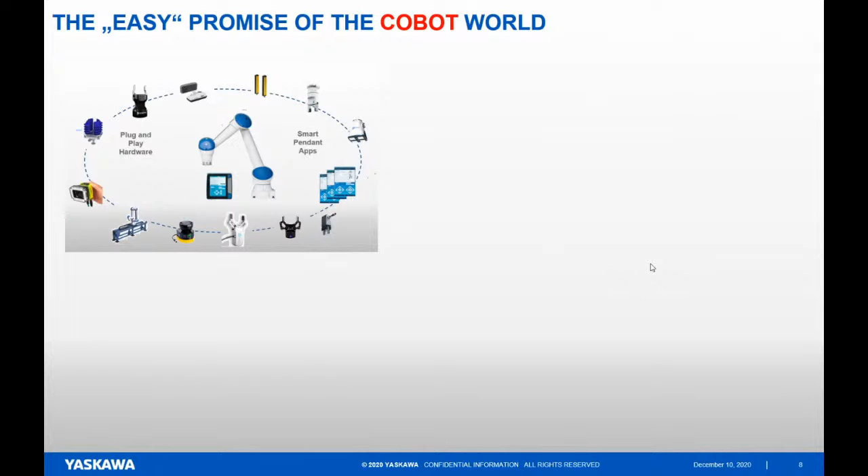The next thinking is about what is the promise which has been given by the cobot suppliers to us. Some years ago, a cobot supplier started the business with a new and fresh idea. I wish it was YASKAWA, but it was another supplier. At first there was a cobot, and that cobot came with a promise. Then there were easy plug and play accessories, but the promise had 4 points. Those cobots are easy to use or easy to program.

Even the word program is not good anymore in those circumstances. The next promise is that the cobot is easy to install. No fences anymore. The robot is easy to invest, it's cheap, and the other promise was it is easy to buy. I think these are the 4 options which have been brought into the robot world by the cobots.

The first point, is it easy to use? There is no discussion about it. Yes, it is easy to use. Is it easy to install? Yes, somehow, but there are also questions about whether it's really okay. Maybe the robot is easy to install. Maybe some of the plug and plays are installed, but is the application in the end really easy to install? That is the kind of discussion in there.

Is it easy to invest? Yes, if you just look at the components, but also here people are discussing, when you look at the solution or the real robotic installation in the end, is that really easy to invest anymore? And is it easy to buy? Yes, I think, but there is also discussion ongoing there. And we learned a lot from that cobot world about easiness.

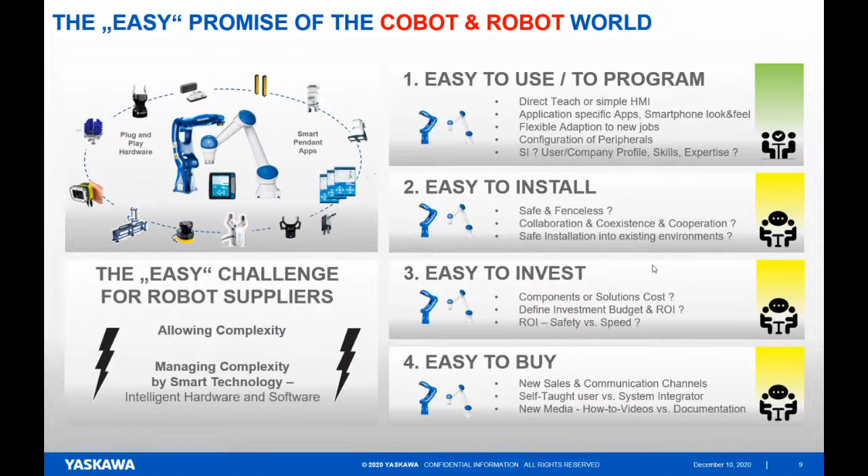This is the easy challenge for us robot suppliers. We would like to allow complexity, but we also want to manage the complexity to make it easy for the users, and we are doing that with smart technologies. The smart approach to realize robot installations.

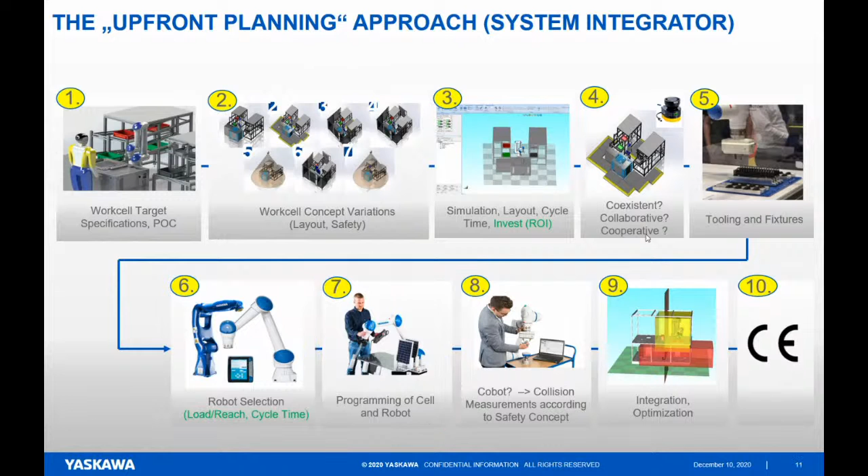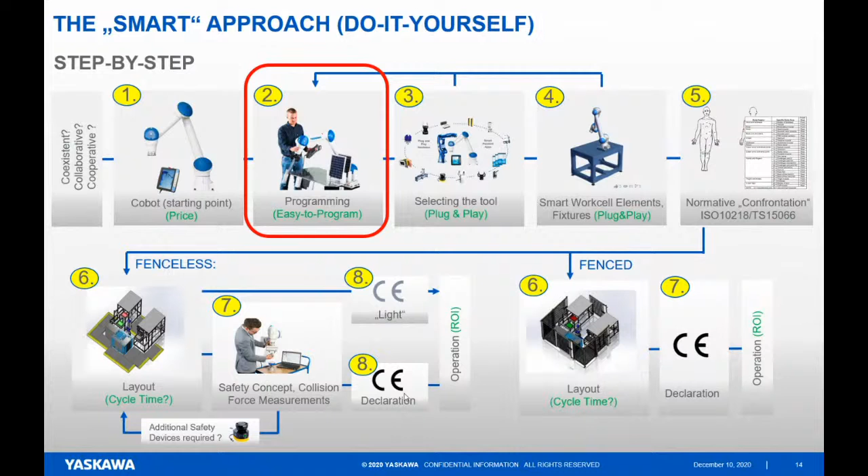So this is a different way how to approach a work cell. And the programming is much more in front of the decision-making process. And in that way, doing that way, programming is somehow in the perception of people much more important.

The variety of robot programming methods. You have manipulators, you have controllers, and you have many different ways today to program robots.

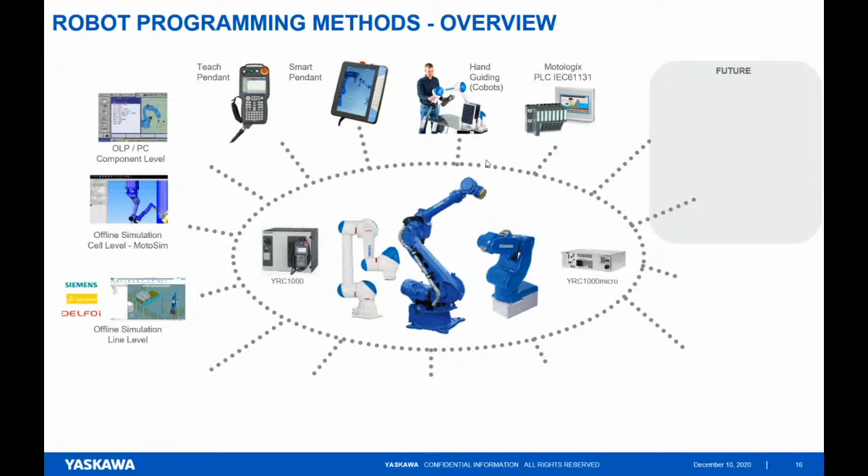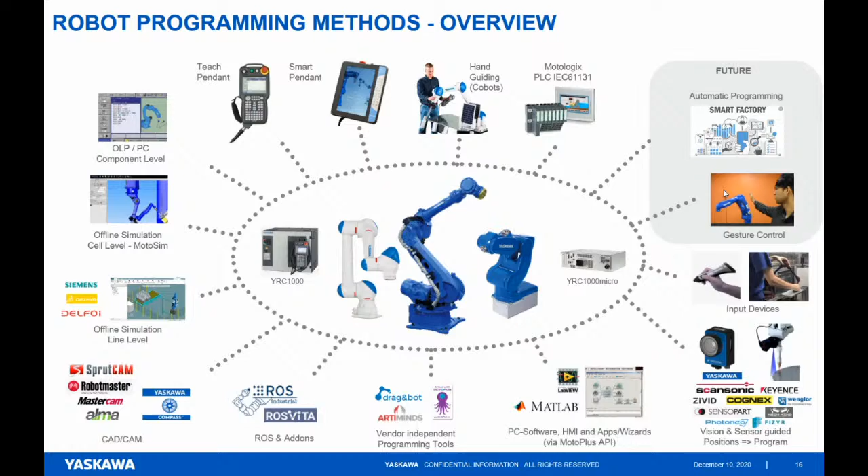Is hand guiding the best method? People say hand guiding is easy, and I agree, it's easy. If you have a palletizing job or a simple pick and place job, hand guiding is a very good method.

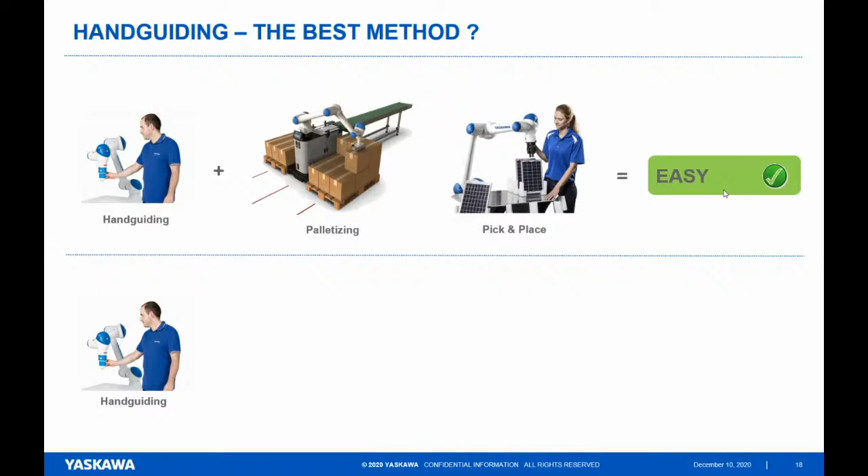But if you do hand guiding and want to do 3D printing with it, and have to manipulate the robot in a curve or in a 3D geometry, you're lost. And also, if you want to program a complete multi-robot arc welding station with 3 welding robots and positioners, and all motion should be synchronized, then hand guiding is really not the best method to program the robots.

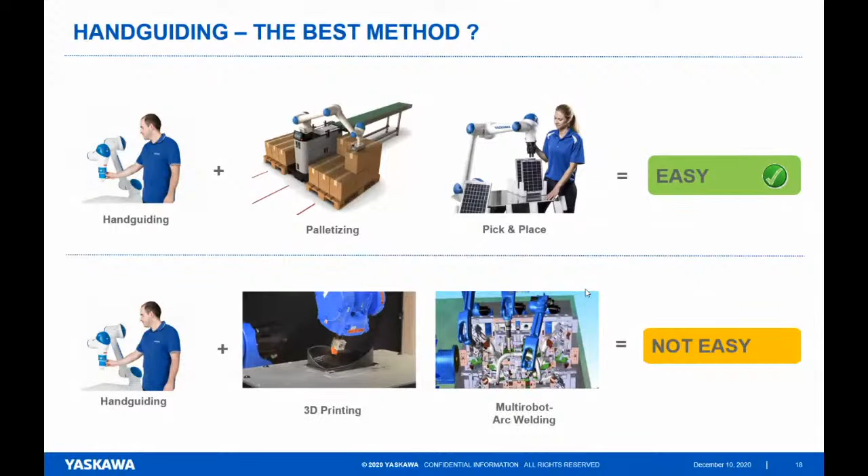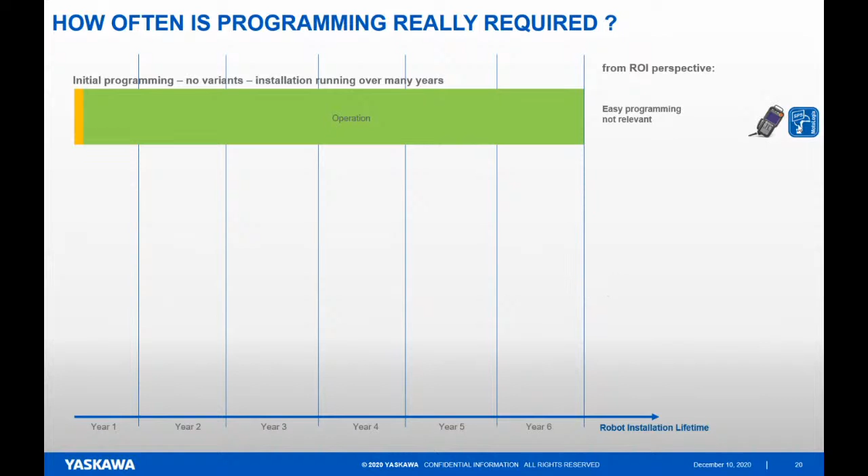Another concern you should resolve in the beginning is how often is the programming really required? Many robot applications have an initial programming, no variants in the beginning, and the installation is running over many years. So it's one-time programming and operation over many years. For that situation, from a return of investment perspective, easy programming is not that relevant.

Then we have initial programming with more variants. If it is possible to include the variants in the beginning, all the different parts, and you know them already, you can bring that into the initial programming. This initial programming is a bit more complex, and you most likely need some more complex features in the programming up front.

And then what many people have in tier 1 automotive is they have to run the line, and whenever they're doing programming changes, they're doing that offline in parallel to the operation. They prepare the program with offline simulation, and then they just break the operation, turn it down for a very short time, download the program and start the machine running again.

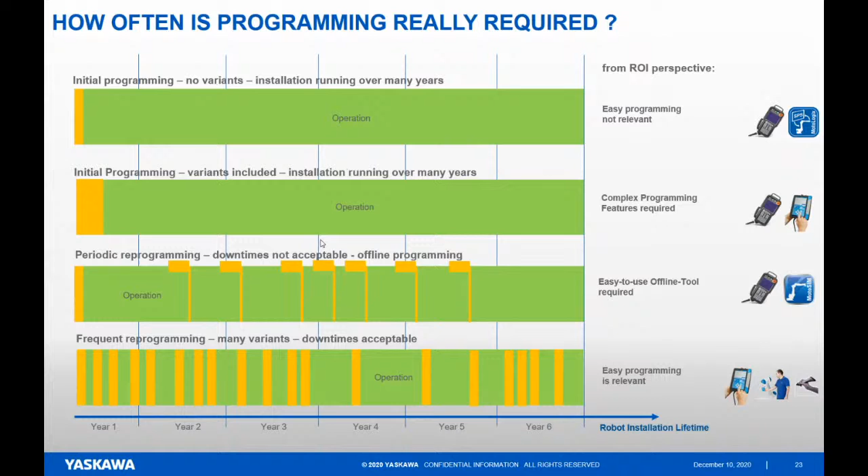So we have the situation where we have very frequent reprogramming and a very short operation time. We have a lot of variants, and in the beginning it's not really clear how many variants we will have in the future. That is a good field for easy programming methods like hand guiding or like smart pendants or easy devices. So in total, when we look at all the applications and the full variety, we can find a lot of examples where people would select very different programming methods.

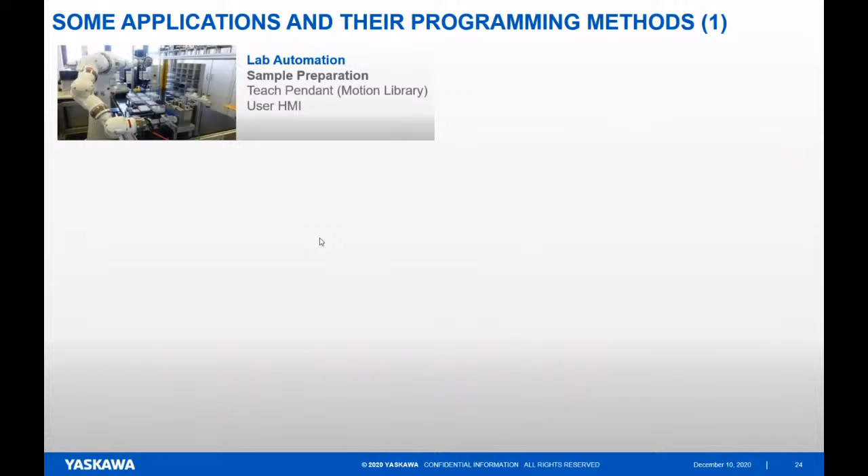Lab automation, that is teach pendant most likely, but in lab automation it's very important to have an HMI that the lab assistant can control, or select the sequence or the protocol, without involving any robot motion programming.

In the warehouse, we most likely use 3D vision or load packing software. In the dairy industry with cow milking, we are using teach pendant and 3D vision.

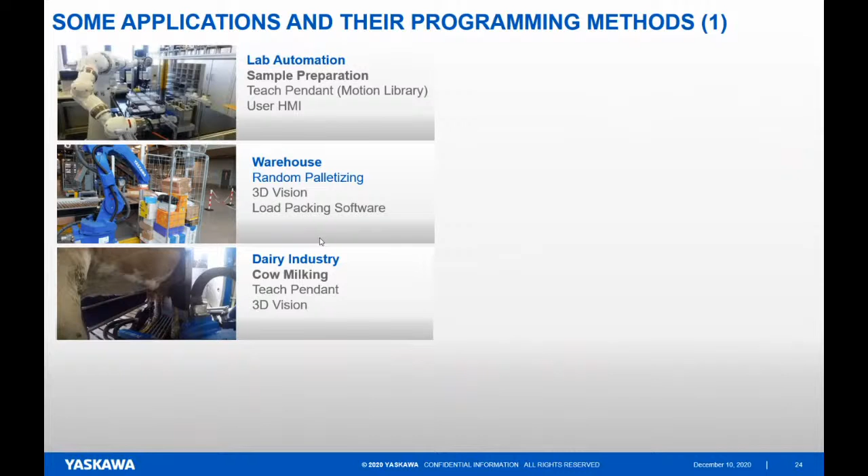In the metal industry, when you want the robot to do milling and deburring, you most likely would start with CAD/CAM tools, software, creating the G code for the robot. In the food industry, we have a lot of PLC controlled lines where people may prefer to program the robot with PLC function blocks.

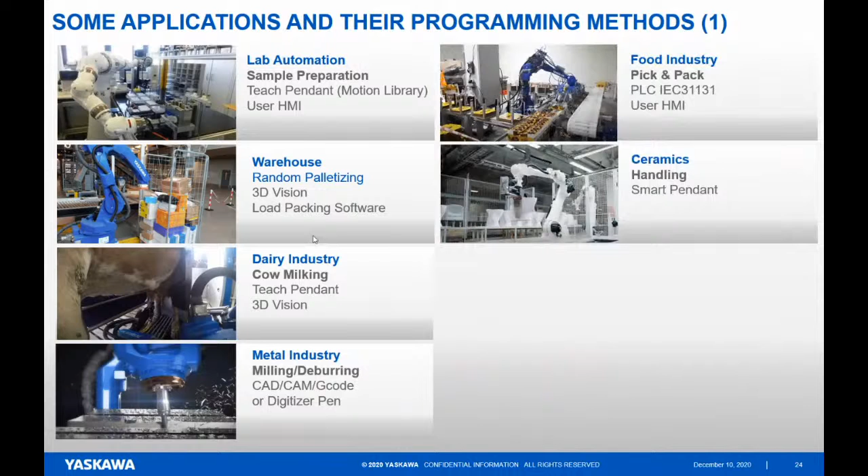In ceramics, this is a pretty simple handling operation, and the smart pendant would be a good choice for that. In logistics, cobot palletizing would be hand guiding, I talked about that already. In packaging, again, maybe an issue of PLC programming.

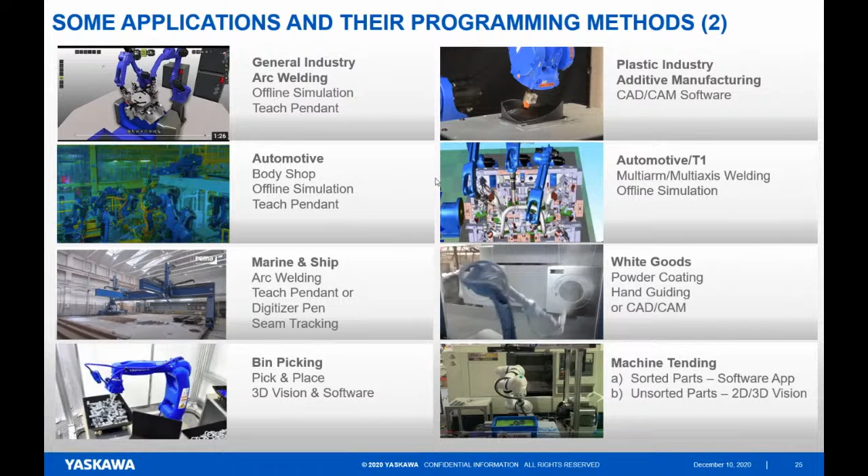I can give you more and more examples about these kinds of programming, but what you're seeing here is basically what I want to say: each market, each application has its favorited programming method, and you cannot really tell people that one programming method is the one for all method for everything.

Some details on the programming method. If we are using hand guiding, details are important. For example, it's good to guide the robot and have some buttons on the robot flange to program it, to avoid that you have to return to the teach pendant for every single confirmation of a step or a position you have taught. So those direct teach buttons give you the option to open, close the gripper, or to take over a position directly on the robot controller's arm.

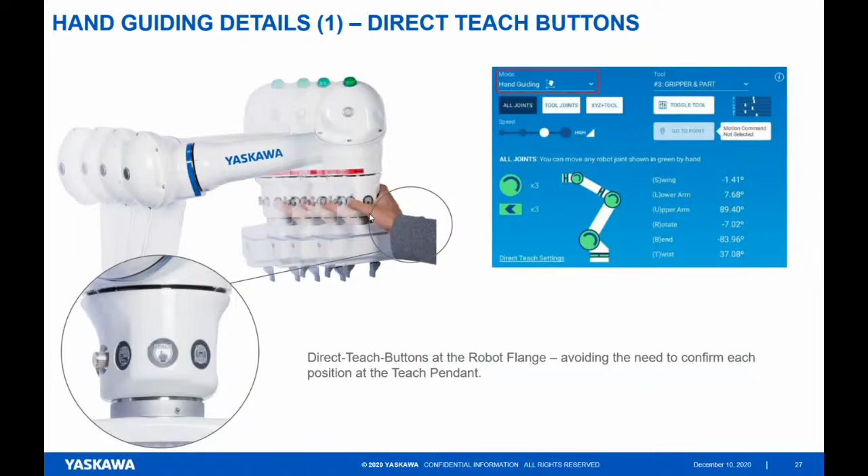The next nice feature is that you can move the robot away at any time to look for where the workpiece is, or if the robot is somewhere in the middle of your view to the workpiece, just move it away and the robot will continue later and return to the position.

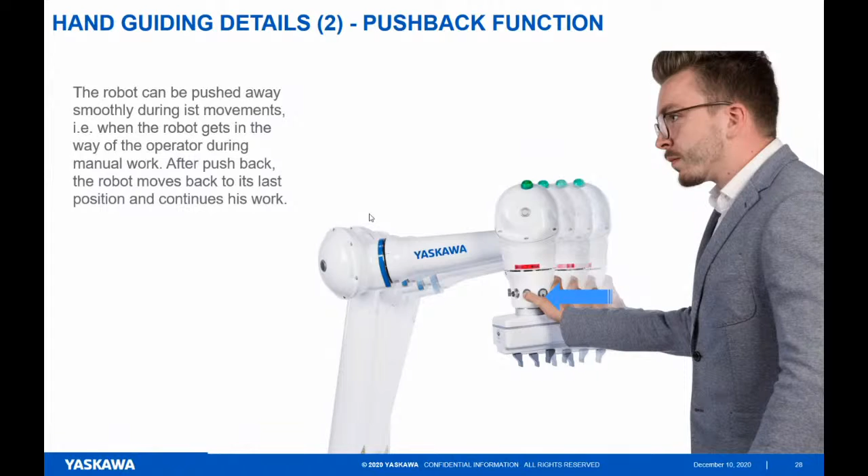An automatic clamping function is useful. When you clamp your fingers, the robot detects the clamping situation and automatically retracts.

Some more details on the smart pendant. Yes, the smart pendant is a good way to modernize a teach pendant with features which you're used to having on your smartphone. For example, one detail in our smart pendant is the gyro sensor we are putting in, and here's a small sequence demonstrating this gyro sensor and its use.

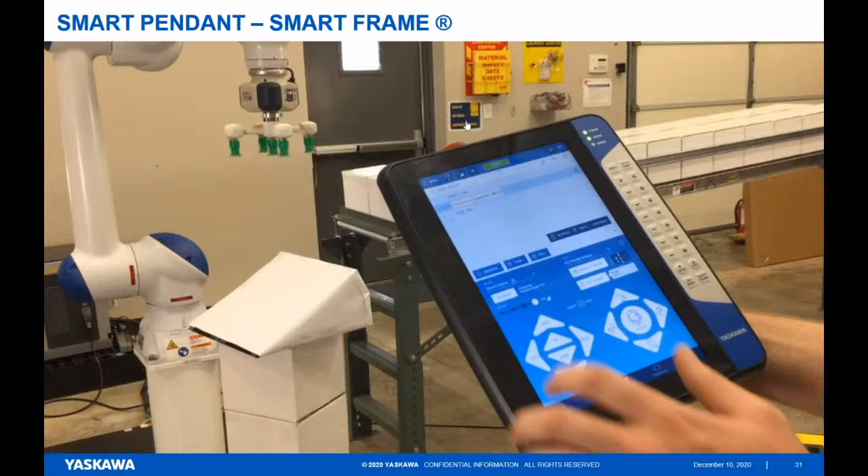So what I'm going to do is calibrate my system by standing in front of the robot, and now I'm calibrating the pendant's position relative to the robot frame. So now left is my left, right is my right. But if I turn 90 degrees, left is still my left and right is still my right.

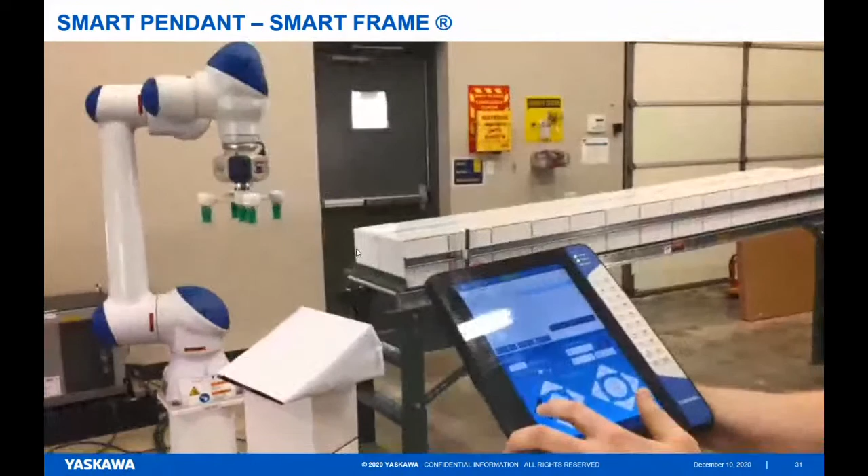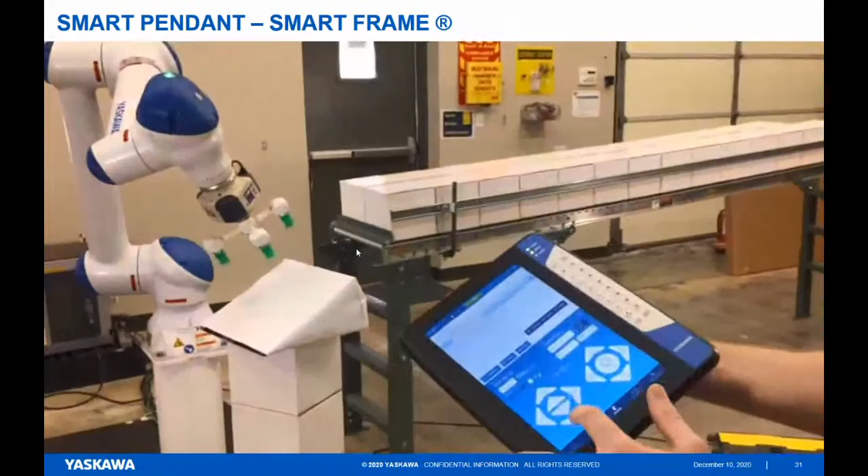So now I'm going to use these features to roughly position this robot with this angled piece that you see in the frame. Here I'm going to tilt the pendant, and the robot will move accordingly. I'm just going to slow it down now that I'm close to the part, and do some fine positioning.

Yeah, that was just an example of what kind of improvements could be done with pendants. This idea of the smart frame was to relieve the programmer from the coordinate system calculations - X, Y, Z - a little bit better. A good approach we are often using in robotics today is software apps or software wizards, mostly on the smart pendants or on the pendants themselves.

Every application can be supported by those kinds of apps. On the left side, for example, there is our welding wizard for arc welding. On the right side, there is a pallet solver, both doing background calculation jobs to help you be quicker in terms of programming.

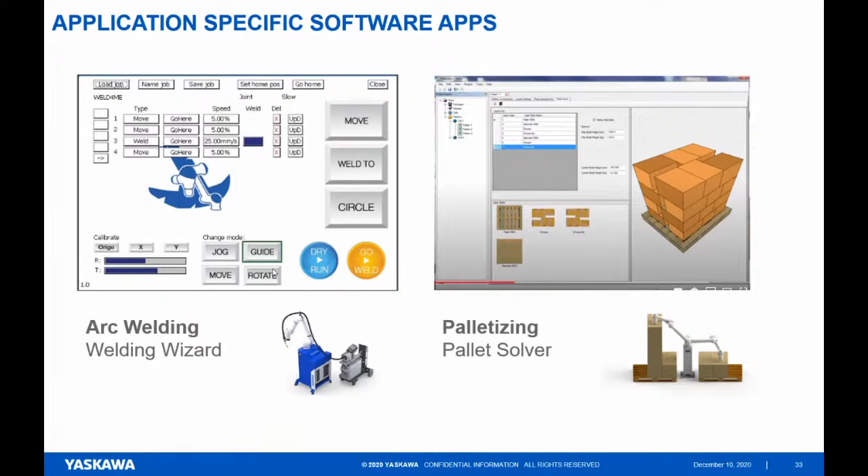PLC programming, I mentioned that - you can program robots with function blocks. You don't need robot programmers anymore. If you have a line like you see on the left side and lower left side, that's a PLC controlled line, and you have 20 programmers and no robot programmers, and you just want to put one robot in the middle - use function blocks, integrate the robot using your convenient PLC programming environment.

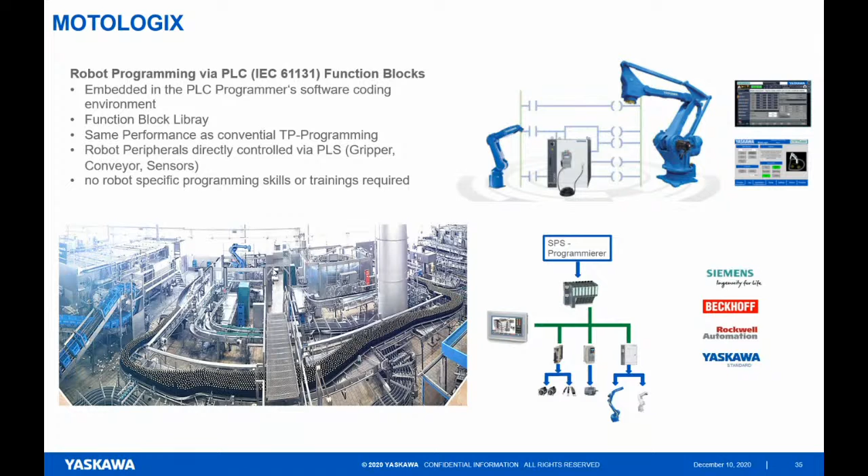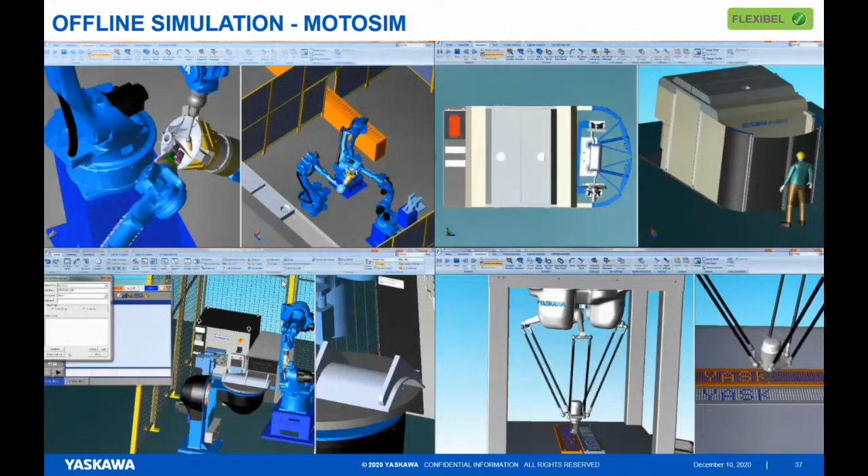Offline programming is a very common tool, often used to simulate everything up front, to make accessibility studies, to make cycle time studies up front. So I would really recommend everybody use offline simulation to understand the concept, to understand if the proof of concept really works up front before you go into steel.

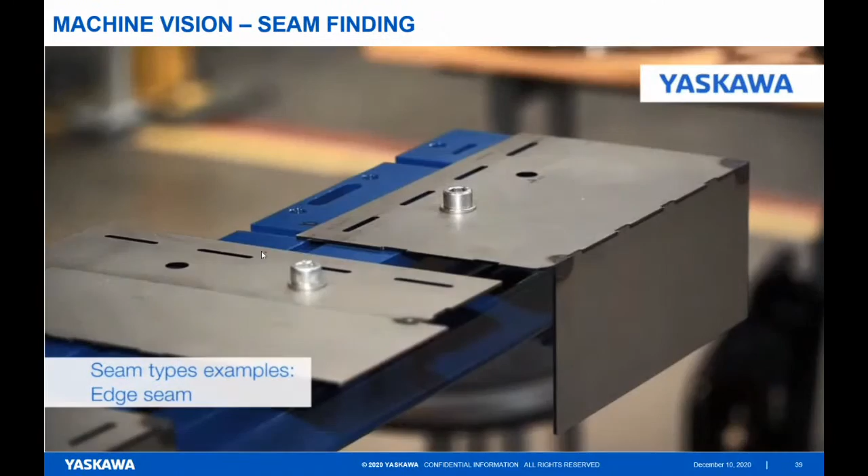Machine vision is a big, growing technology, enabling robots to see more and to be more flexible. One example over the years is to show the robot where the target position to start is. In arc welding we use sensors, but we use that kind of camera in many applications, also handling applications. So camera-guided robotics is very common today.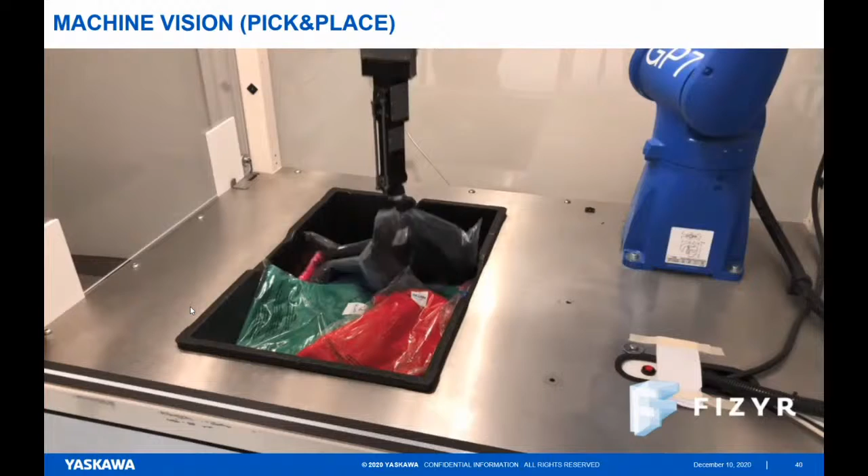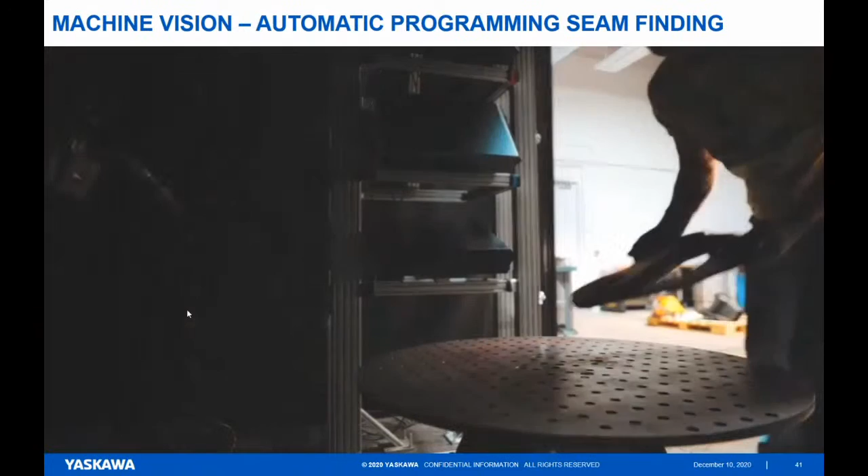More advanced camera guiding is 3D bin picking, 3D vision controlled. Some of them come with image processing, some with neural network background calculations, and that could be an exciting idea. You want to weld some parts - just put them on the table, press the button go, and the robot automatically scans the part, understands where it has to weld, and just starts welding without any programming work. It's just tracking the welding path itself and then welding automatically.

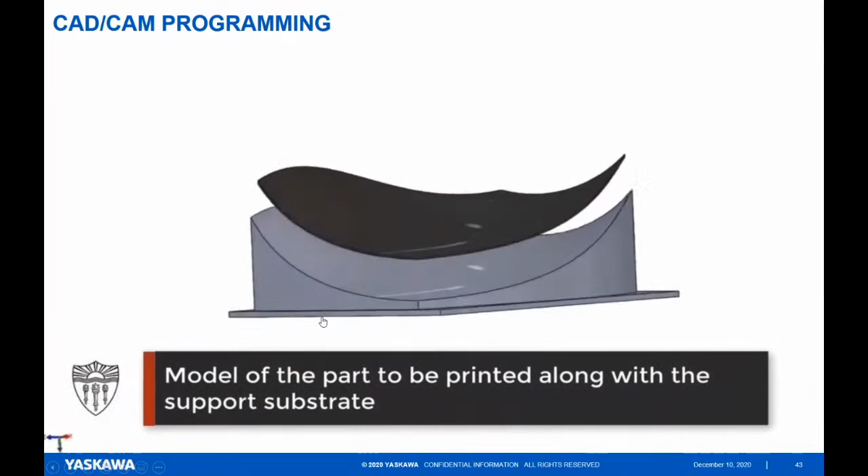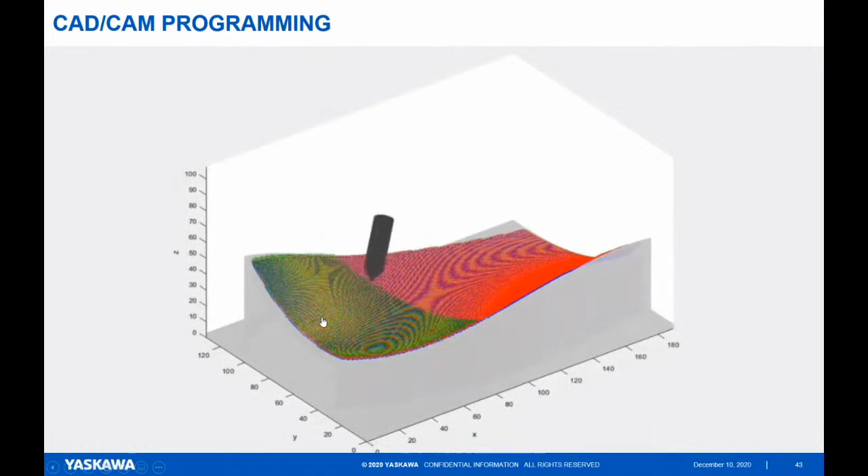The CAD/CAM-based programming method is good for 3D printing or any additive manufacturing, and also for every milling process. You have a 3D part, and the software generates layer by layer a robot path for everything, then transmits that path to the robot, and the robot executes this path.

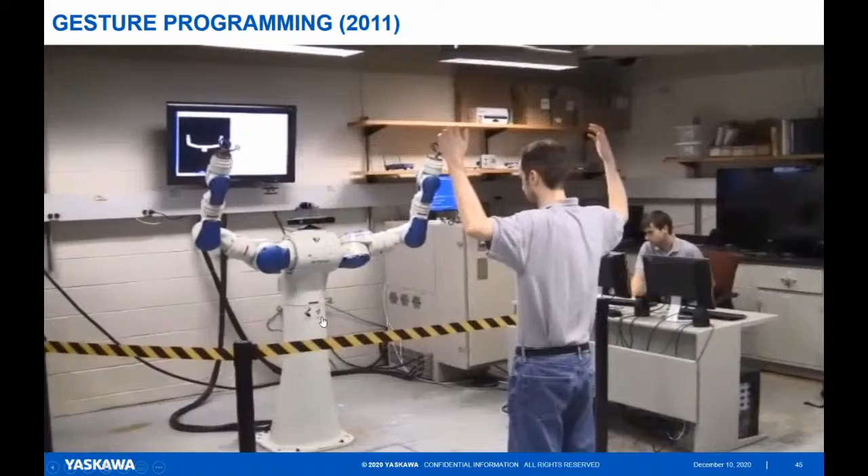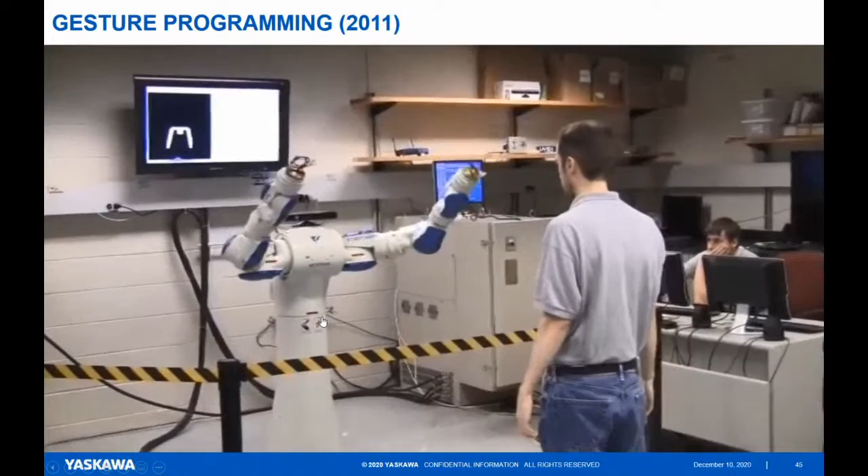Gesture-based programming - that was a big hype when the Xbox Kinect came out. Everybody played with robots and Kinect doing gesture programming at that time. It has not really been successful over the years, but people are still working in that field. It's not really a common method - maybe a future method.

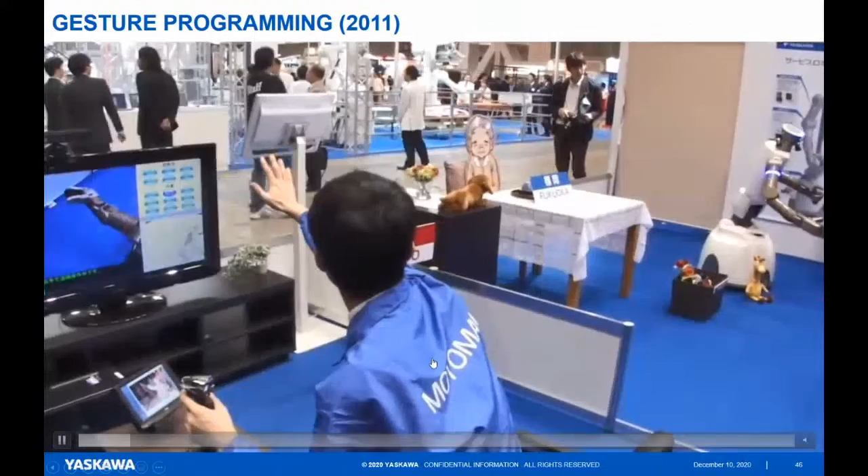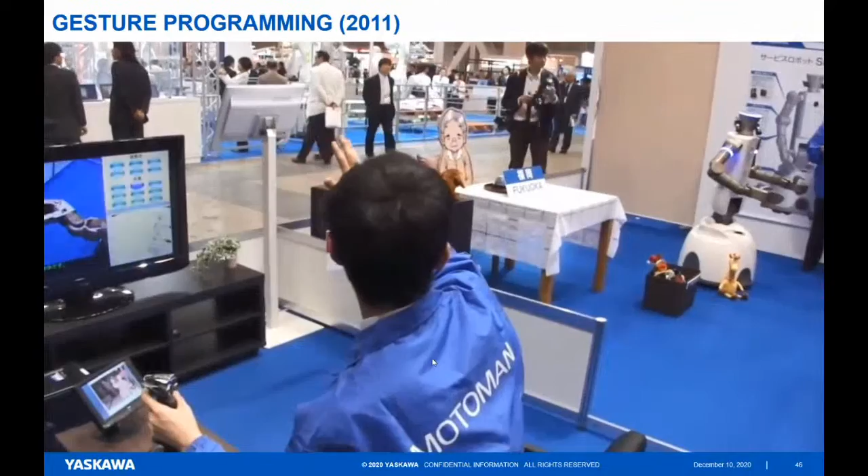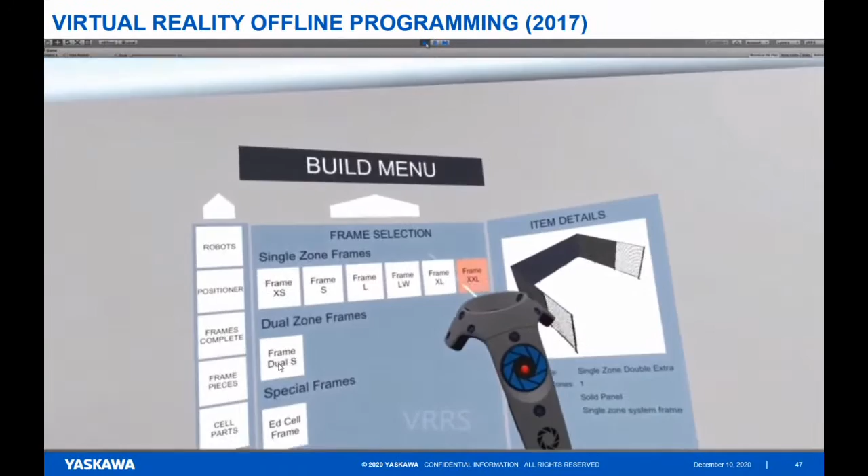This is an example shown at the fairs, where a remote controller does gesture controlling, transferring his movement, and the robot is able to do a complete remote control using that method. And the coolest method is to go into virtual reality, to go into the cell and compose the cell using virtual reality glasses.

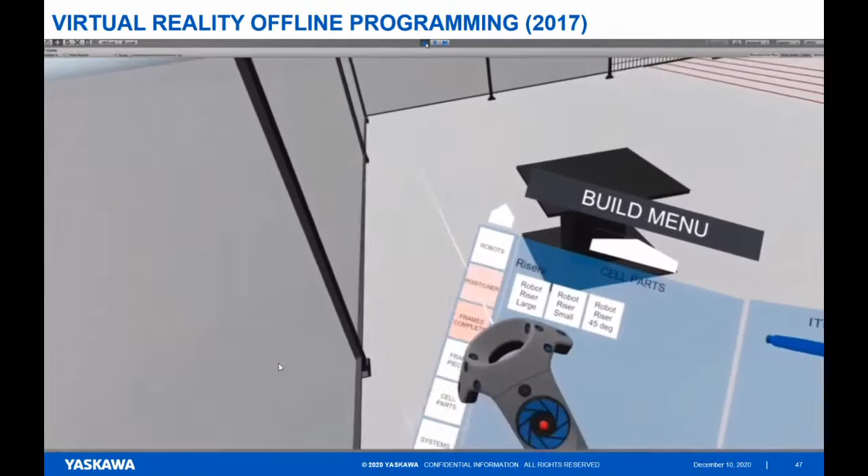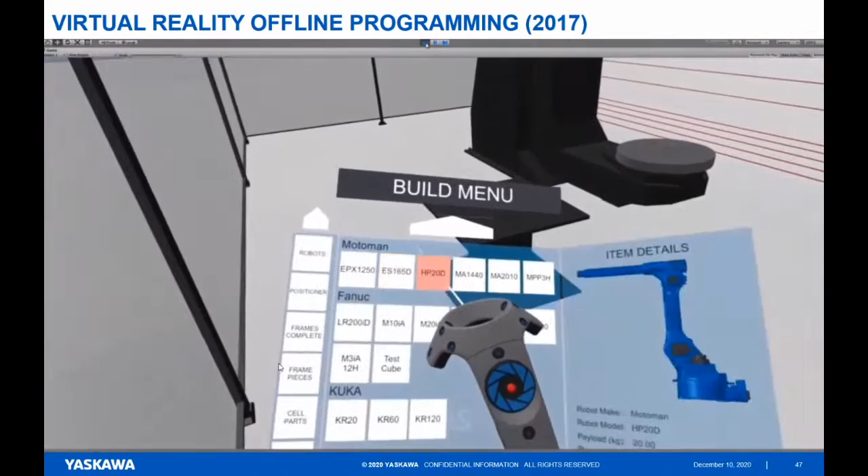And this is an exciting method where a lot of people are working on right now and trying to build cells really by going into the cells and composing the cells. In this picture, what you see here, it's just the gray and the blue background, but you can put in a scan of your environment in there. Then you see the installation really in your environment, your hall, and your installation, what you see later. You can even put on HoloLens glasses and do augmented reality planning live in your factory.

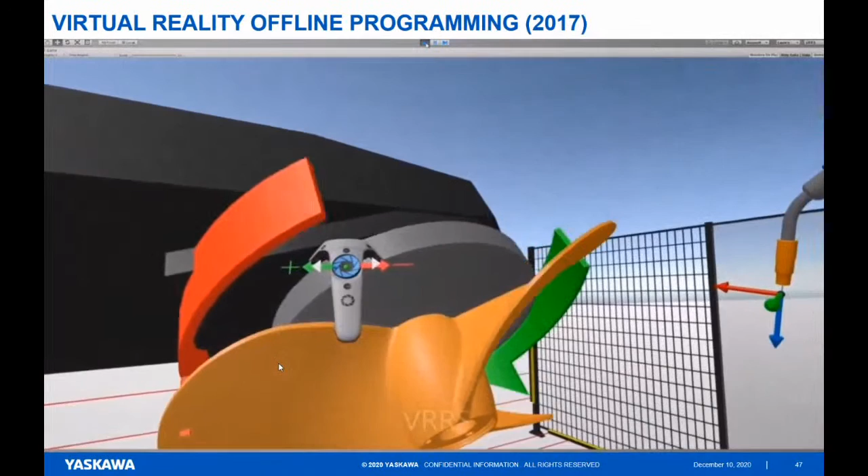And maybe in the future, maybe you don't need to program robots at all. In the smart factory, which is really breathing, you can imagine that robots can code themselves and then can automatically adapt their jobs to the situation they have to do. This is a very exciting field of the future. Some conclusions. Looking at all the varieties of programming methods, we have a lot of methods. It's most likely not easy to find the right application, but in the end, robot programming is easy in total.

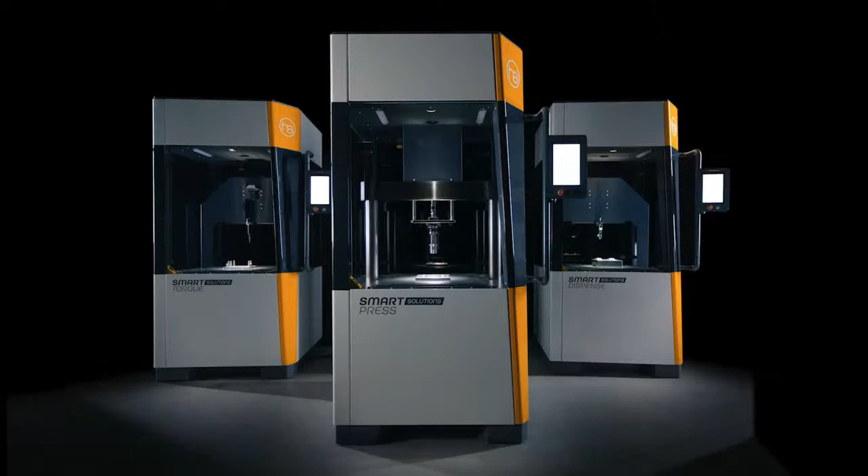The main focus during the development was put on the software. And the SmartSolutions are operable by everyone without the need of a PLC programmer to set up the program. You can see it here on the picture. We used a normal Samsung Galaxy tablet, and it's a web-based interface with graphical user interfaces. It seems like a smartphone when you have the tablet in your hand, and also the interface is really simple. And you can do it with a fingertip, teaching programs and teaching new articles inside the machine.

On the following slides, I will go into more detail about the functionality of SmartSolutions, and I want to show you the advantages and the production of tomorrow with these machines. The machines are made for smaller scale productions and lower volume productions, and also productions with a lot of article variances, because it's really simple to teach new articles inside. We have standard processes inside, and we started with the SmartSolutions press, the SmartSolutions torque with a screwdriver inside, and the SmartSolutions dispense for dosing grease, oil, and thermal paste.

All the components are integrated in one software, so the user is just in contact with one software at all, and he doesn't need PLC programmer knowledge to get the machine running. So we have expert level systems at an attractive price. Also, the price list is coming on the next slides.

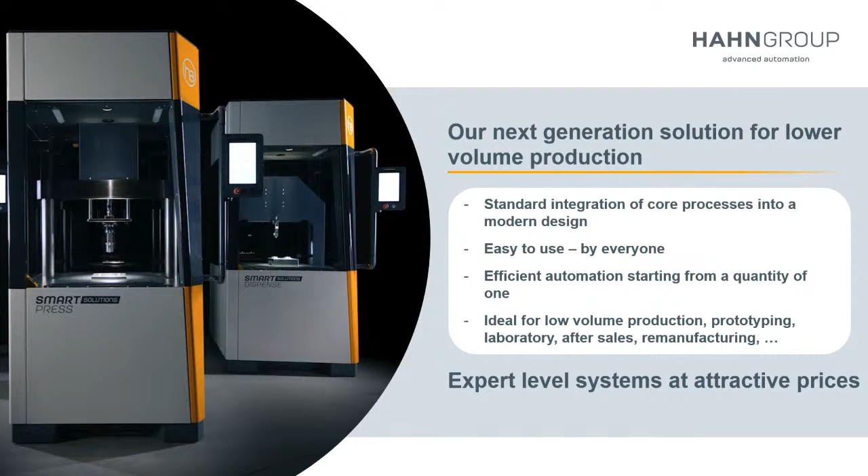We have a moving range inside the machine of 200 by 200 millimeters in the XY position, and we have also in the Z position 200 millimeters of moving. So the article is moving here inside, and the Z-axis is moving the process part. In this example, it's a press. Here you can see the torque, and on the right side there's the dispense. So you can see the cells are looking nearly the same. Also, this moving traverse is in every cell the same part.

The front area is open, and here we have a safety camera. When you go inside the machine, it securely stops, and when you go outside, it starts automatically again when the area is free.

We go on to the standard features inside the SmartSolutions. We have latest generation processes, and for the screwdriver we use a screwdriver from Bosch Rexroth. For the press, we have a press kit from Festo, and for the dispense unit, we have a valve from Walther. So we have expert-equipped parts inside without the expert knowledge. That's the main focus of this software inside the SmartSolutions.

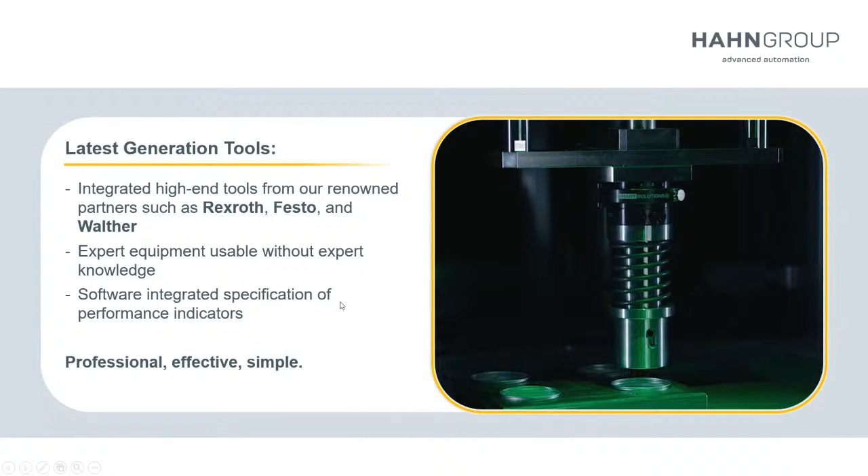The next point is the main part. That's SIA. We call it Smart Intuitive Automation, and that's the software to teach new programs and get in contact with the SmartSolutions. We use a wireless tablet. Thanks to the safety camera system inside, this safety system is permanently active, and that's the reason why we are able to use a Wi-Fi tablet. The teaching process can be made by the tablet on its own, so nobody needs to go inside the machine to teach it, and that's also a reason why it's possible to use a Wi-Fi tablet.

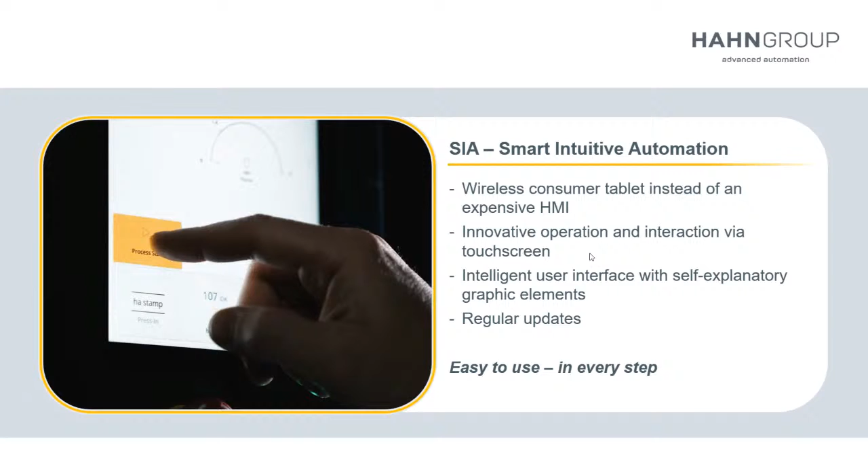We have an innovative operating system, and the interaction is via the touchscreen, and it's not the normal HMI. The consumer tablets are really good in the touchscreen functions, and you have the feeling like you're using your smartphone. Also, the software SIA will get regular updates. So if new program features are developed, it's possible to get them on your machine and to download updates automatically.

The next point for the cell is the integrated safety system. Here you can see it in the front area. We have the safety camera, and on the back side we have a backdoor sensor. If you open the system during maintenance or service, the security system is also cut off. There's no training required because this safety system gets commissioned in our house. So at the customer side, there's no need to get in contact with the safety system. The safety system is always active, so it's safe every time.

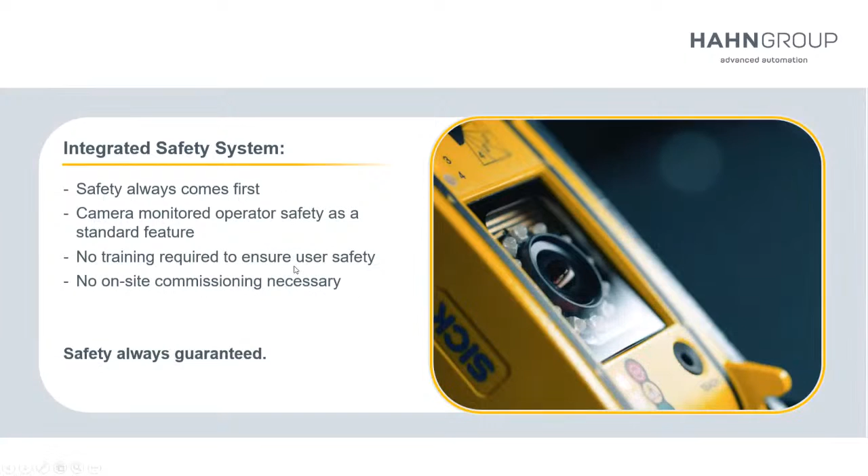Next point is the integrated live camera. With this camera, we can take a picture of the article from above, and we use the camera for teaching the process just with the tablet. Here you can see a live screen from the tablet. We have this overview picture of the article that's inside the machine. The article is on an article fixture inside the machine, and you can see some editing points here in the XY position. And on the right side, you see the live camera with a 3x zoom to get these positions really safe and close. We have a direct recording of product images when teaching a new program. So also in the program menu, you see directly which article is meant with the program, and you can select it easily.

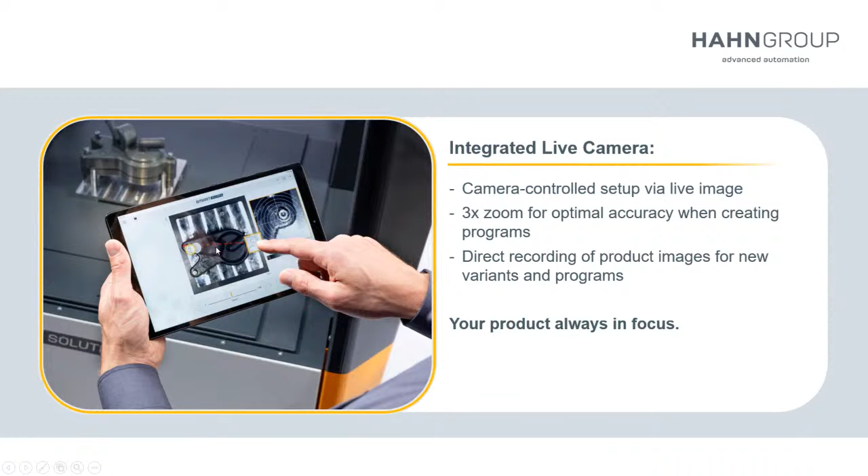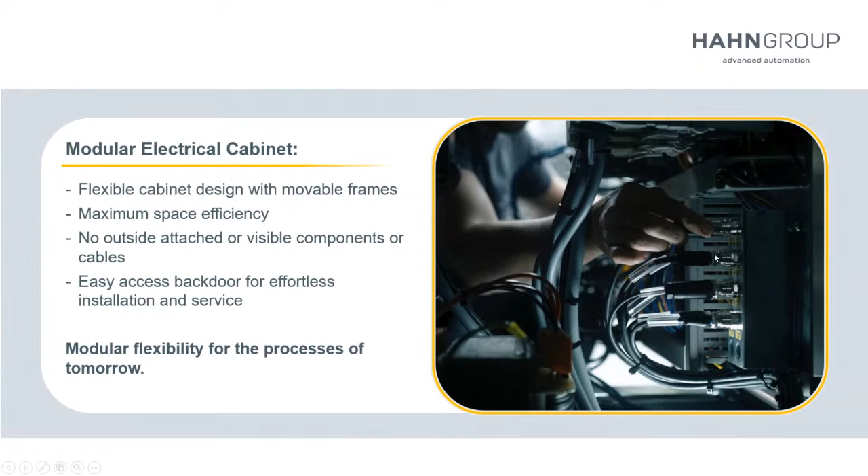Next point is the electric cabinet. All electric components are under this table in slide-in units. That means all components are inside the machine. So we have maximum space efficiency, and we have no outside attachments or visible components on the machine. They're all inside and safe under the table. For maintenance or service, we have easy access because of the back door, and the slide-in units can also be pulled out completely, so you can easily reach all the components when there's something to do with them.

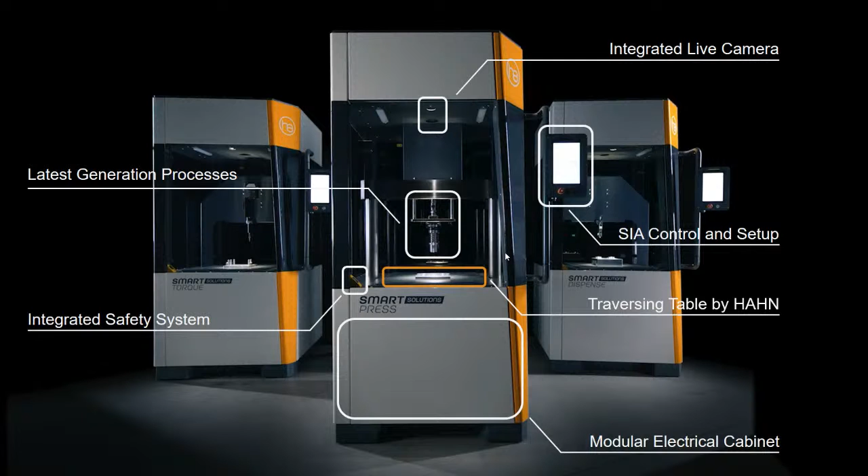Last point is the traversing table. That's our own development inside the SmartSolutions, because we use this table in every version. On the press, it has to handle 17 kilonewtons, and on the torque, it has to handle 12 newton meters. And we use it in every SmartSolutions, which has the benefit that the user interface is the same in every SmartSolutions, and it's always simple.

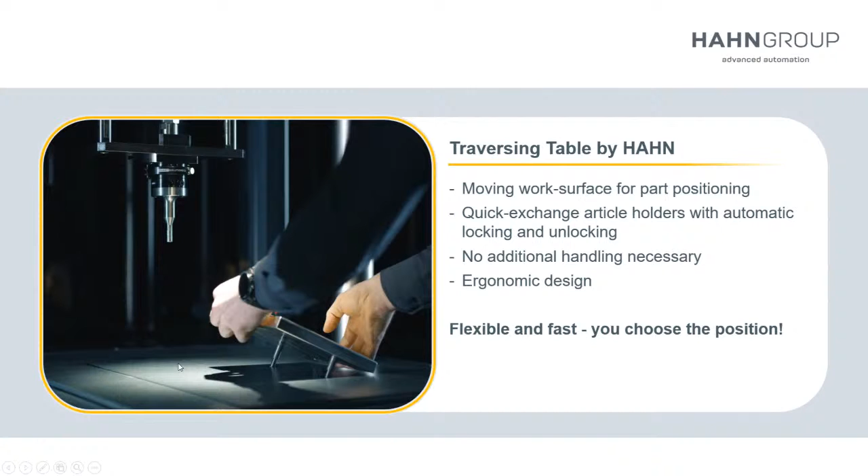Also a good point on this traversing table is the automatic quick exchange. We have a defined position on the front right, where you can take out this article fixture really easily without a tool, and put in a new one to change to another article. On this picture, you can see the press. There's also quick change equipment inside so that you can easily change the tool for the press. It's an ergonomic design. You can see that there's a complete housing over the moving parts, so there's no safety problem, and there are no issues on the table.

Here are some key facts for the SmartSolutions press. It's available with a force of 1.5, 7, and 17 kilonewtons. We use the same frame every time in the SmartSolutions. It can hold up to 20 kilonewtons. You saw already the quick change system for the press, and also for the article on the lower side. The press is perfect for sleeves or bearings and embossing surfaces. We have force-displacement monitoring during the process, so that you have the limits of this process and monitoring of that. During teaching, the monitoring force is set automatically, so that you have an OK and NOK indication when the process is running.

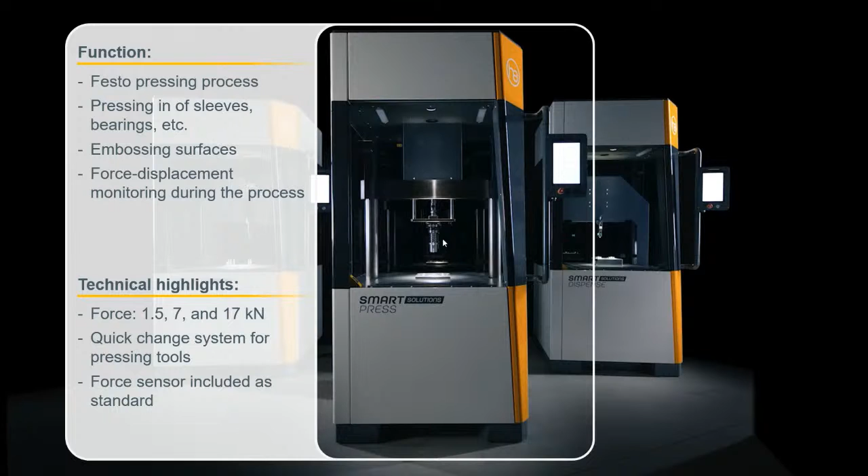This whole equipment around the press is equipped by Festo, and there's a press controller inside, the force sensor, and also the joining spindle.

The SmartSolutions torque: there's a screwdriver from Bosch Rexroth inside. It works with the Wi-Fi connection, and there's also the controller included in this screwdriver. It can go up to a torque of 12 Newton meters, and it also has monitoring of the torque curve, visible via a diagram on the tablet. There's also a quick change equipment on the lower side of the screwdriver, where you can use the standard bits.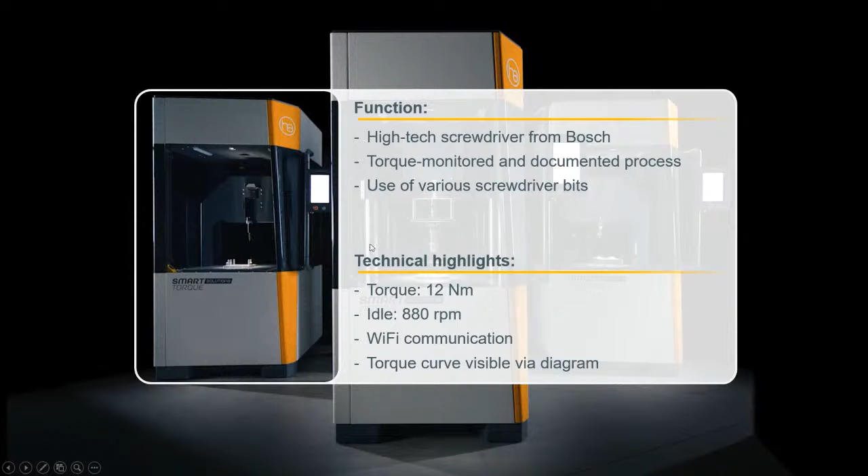The SmartSolutions dispense is equipped by Walther. We can go into the applications of grease, oil, and thermal paste, and the valve can be equipped as a pulse or spray dosage valve. Almost every contour can be realized because of the integrated motion controller. So every 2D contour can be set by the software SIA.

The application quantity is determined by the speed of the motion controller, so that the constant quantity is applied over the entire dosing path. For this function, there's no special programming knowledge necessary because it's a standard function inside the SmartSolutions. The dosing quantity depends on the speed of the moving, so nobody needs to spend time to get these 2D contours dosed.

On the next pages, I want to show you how to generate a new program in SmartSolutions. So we press on Article 5 and can give our new program a name. And the SmartSolutions will automatically take a picture of our article. So here you can see the overview picture from this article, and there are already 3 editing points edited on this overview picture.

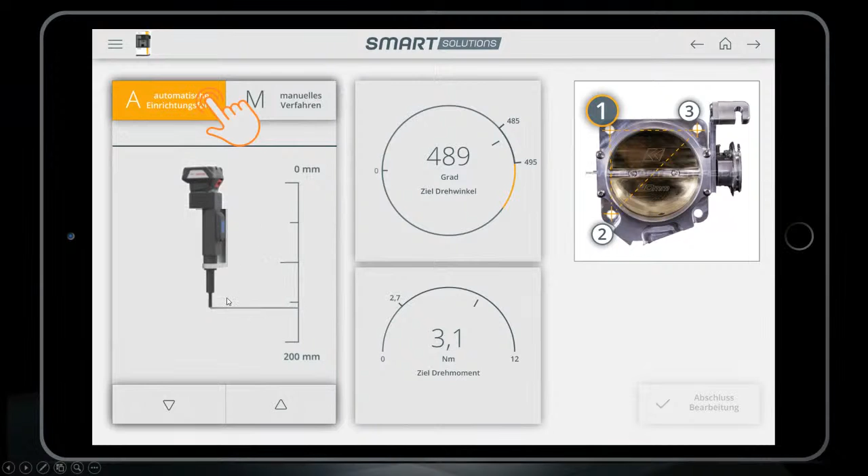On the next page, we go on teaching the screwdriver's position and the screwdriver final torque. Here we have 2 possibilities. There's a manual positioning of the Z-axis by jogging these buttons here up and down, and there's also a possibility to make an automatic set of the screwdriver's position. When we press here, the screwdriver goes down until the Z-axis recognizes the force. That means that the screwdriver contacts our article position.

On the next step, we press one of these two buttons in the middle, and the parameter window appears to get in the angle or the torque for the final screwing process. Here it's possible to put in the parameters you want. If you don't know the final parameters for your process, you can put in, for example, 1 Newton meter, press OK, and the screwdriver makes a test screwing up to 1 Newton meter.

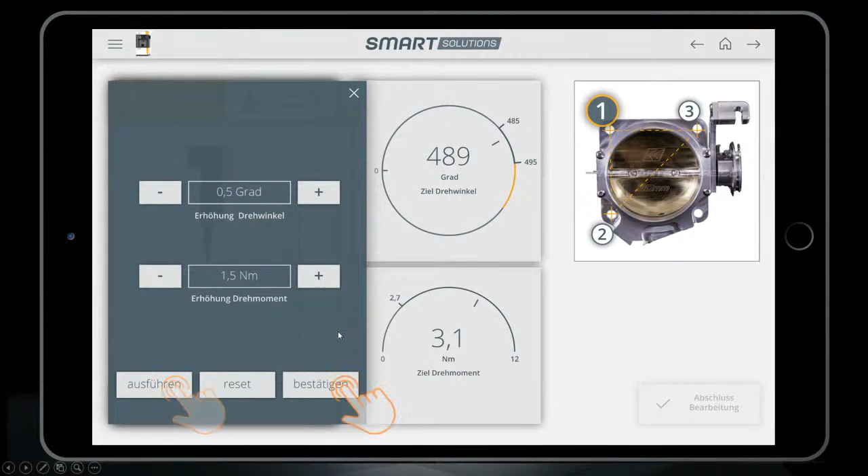Then you can look at your article. If it's okay, you can save it. If not, you can change this Newton meter parameter, and you press again on OK. The screwdriver automatically makes this new parameter set. Then you can watch your article again, and when it's okay, you can save also this position, and that means that the process is done.

On the next page, you can see a diagram of torque and angle of rotation, and also you can change this with the possibility to adjust the monitoring limits manually. You can also accept a proposal from SIA. You can see it here. From the data from the process, SIA makes a proposal and shows you automatically this curve for the OK and not OK check. If you want to change it, you can move these buttons, or you accept the proposal and just go further in your program.

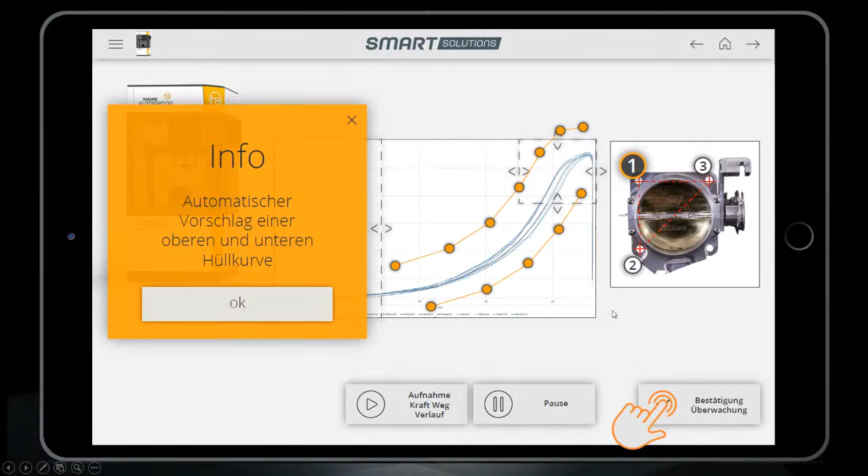After that, the new program is set. You can see here the overview picture, and now you can run the process with a new article. That's the home screen. You can see here the parameters from your process. In this view, the angle, and here the Newton meters. When you press start, the machine automatically starts your teach program.

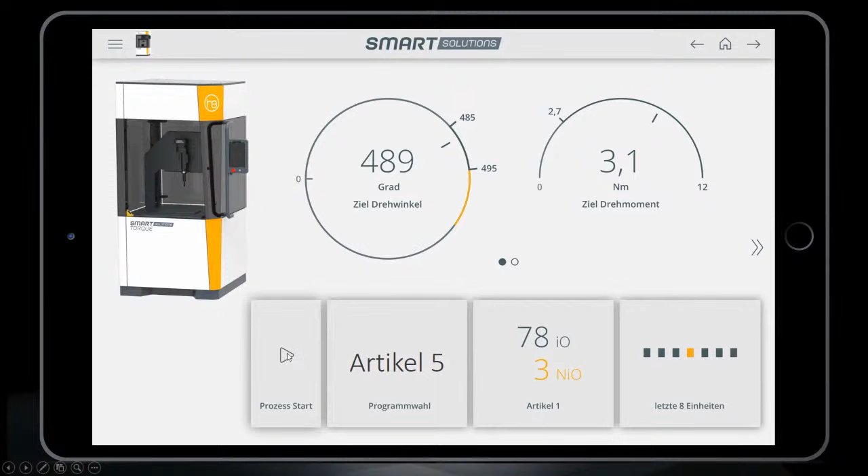And that's the way how to teach a program in SmartSolutions. It's nearly the same doing it in the press and also in the SmartSolutions dispense.

This is the price list. We made it in 2 steps. So in the first one, there's a SmartSolutions housing with the standard cell inside, with the whole security system and camera system in the front area. The camera is also part of this housing, including the motion controller with the X, Y, and Z stage, and the modular control cabinet. This is for 39,900 euro. And additional to this housing, you can add your process you want.

We have here the torque process with the torque controller and screwdriver, including the connection to a SIA. This is around 12,900 euro. For the press, we have three options, 1.5, 7, and 17 kilonewton in this price range, and also the dispense, including the material feeding and the dosing valve for around about 9,900 euro.

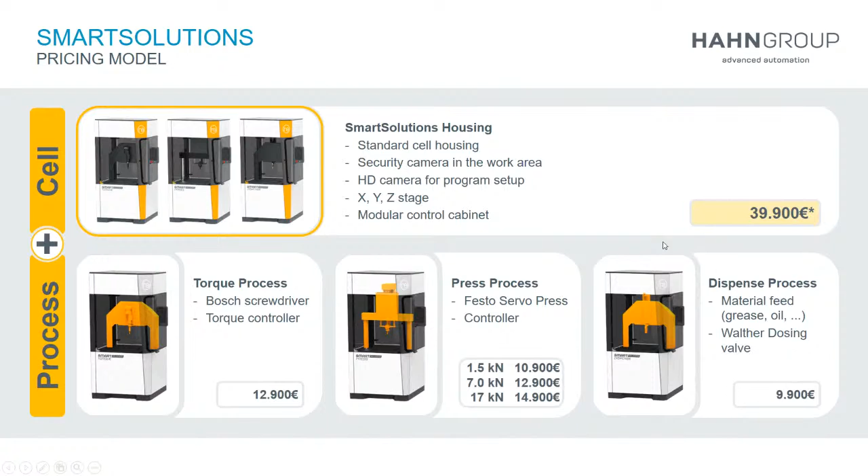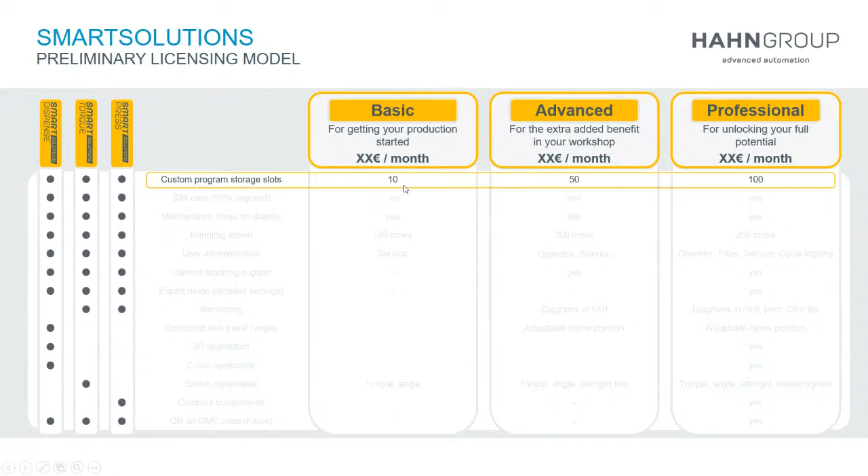In the next slide, I want to show you the license model. So we have a basic, an advanced, and professional license model, and different features here. For an example, you can choose the program storage slots. In the basic version, 10 slots, and in the professional, for example, 100 slots. So it's possible for you to start with the basic one, and if you need more, you can update it, or if you don't need it anymore, you can also put it back again to the basic and can save money regarding your process.

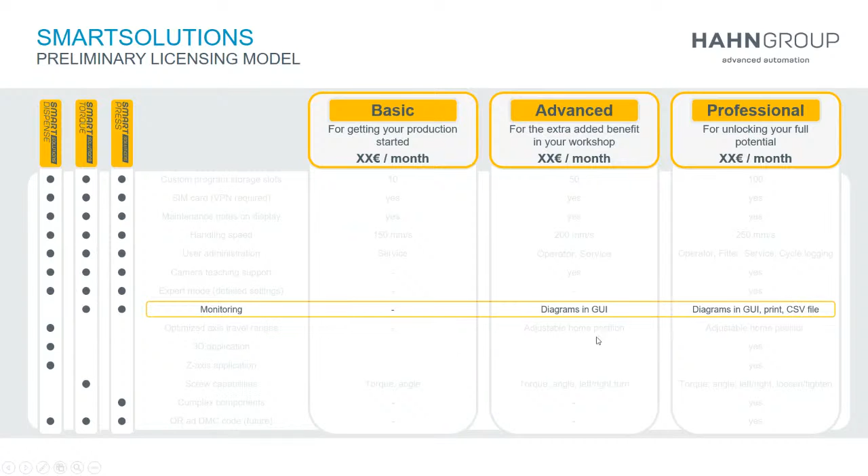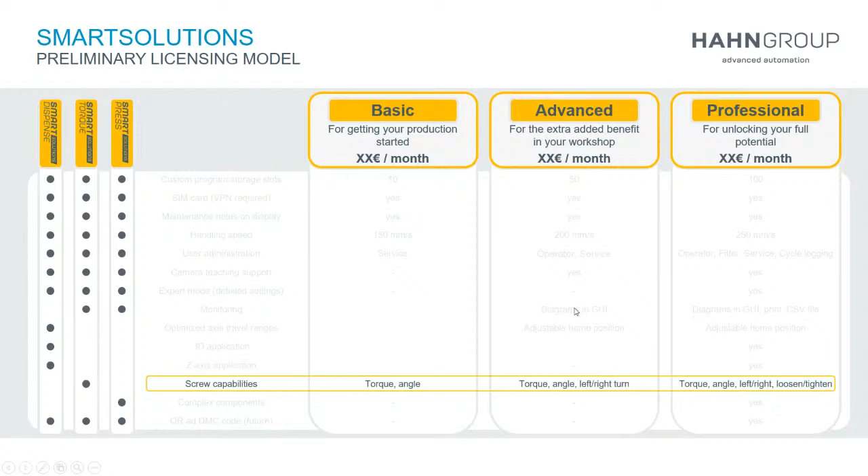The same in the handling speed. If it's just a cell for a laboratory or not for industrial use, you can also adjust the handling speed from 150 millimeter per second up to 250 millimeter per second. The monitoring is also split into the license model. On the advanced, you can see the diagrams on the tablet, and in the professional version, you can see the diagrams, you can get a print version on a USB connector on the machine, or you can download CSV files directly connected over Ethernet. Also, the screwdriver parameters can be set by the basic, advanced, and professional version. So we have different functions here how to set the machine.

The service concept is also really special because that's the first machine where we have regular updates and you get new functions inside. And we have a tooling service so that your production will be every time ready for new articles really fast. If we get the order from you, we can provide you in 48 hours the finished article fixtures with our manufacturing in-house, so that you are always ready for the next task in your company.